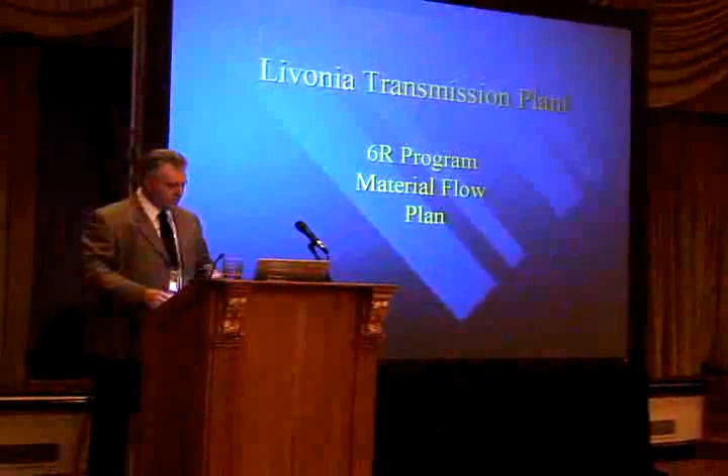Did you have any more questions before we get started? Okay. What I thought we'd do is go through this presentation a little bit quickly, then give you more chance for questions, if that's okay. It's not terribly involved. I hope maybe you've read some of this or looked through it before, which will make it easier to go through the question period.

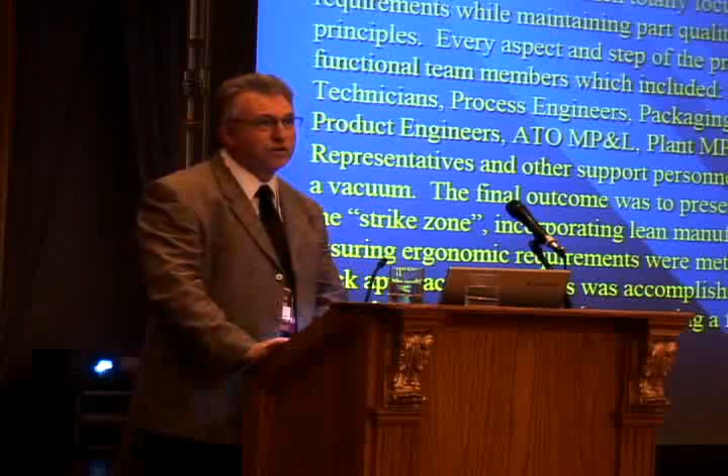In looking through this, you can see, especially in the center body, at Ford we don't do anything alone. There was a whale of a team involved in all of this, as you'll see from some of the documentation, forms, and different things we use. In smaller companies you don't have the head count to do it the way we did it, so feel free to adapt anything as you can. But this was a team from a lot of different aspects that made this thing work.

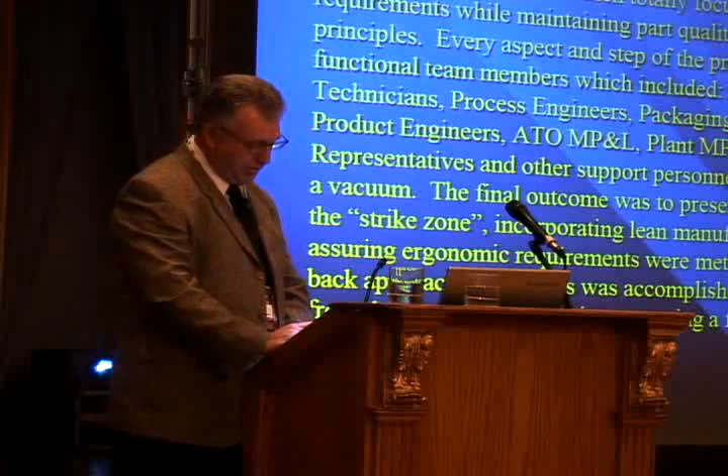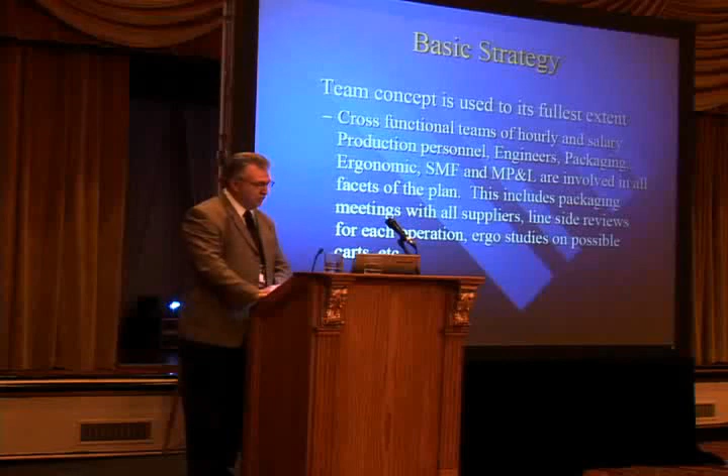More on the engineering side, the team between the ergonomic and the SMF teams—let me explain some of the Ford lingo here. MP&L are the material, planning, and logistics people. I interface with them a lot; they're the ones on the floor actually making it move around, and trucking between plants or between suppliers to our plants. Then, of course, ergonomics was the next biggest thing that fell into all of that, as well as personal safety for the people.

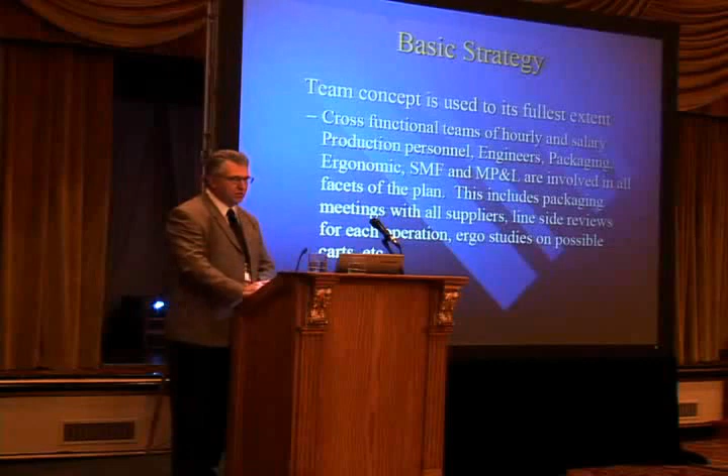This outlines some of the scope.

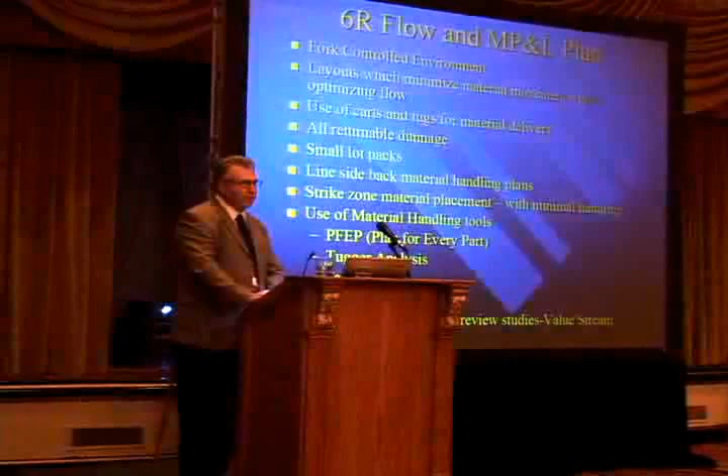When we started figuring out what we were going to do for this program, we had a clean slate when we were building this new line for 6R. We wanted to get away from high-lows and large displays of stock, trying to head towards a lean environment.

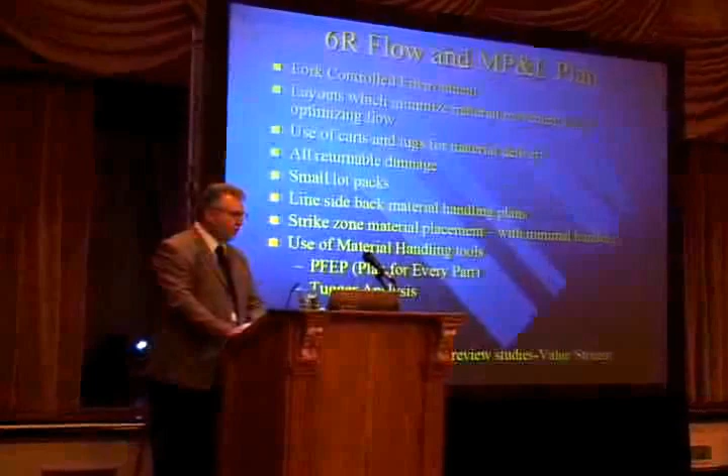So from that, one of the key things was that we started from the line-side back material handling system, trying to put everything in the strike zone so that the tech on the line, actually making products, could focus on that. We took away as many complications, problems, or issues associated with their workstation. Workstation design was a big factor over and above just moving the stock.

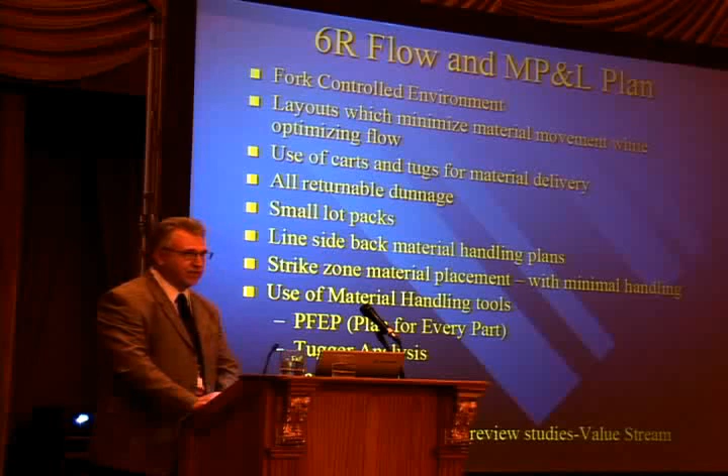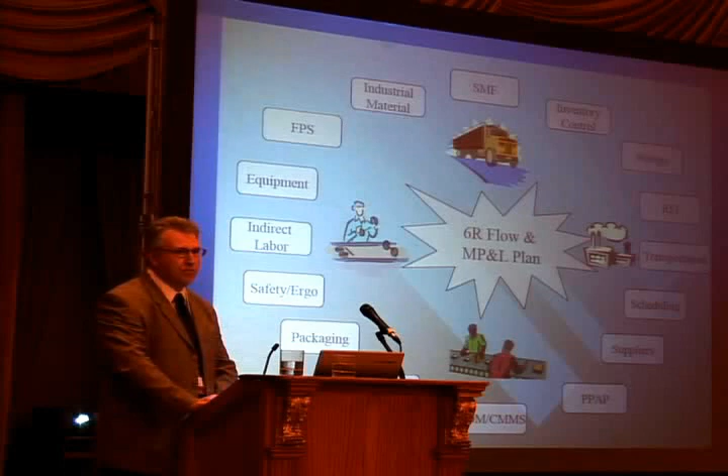The teams and people involved in this included the FPS, the Ford Production System, safety and ergo, packaging, storage, and transportation. A lot of these are various aspects of MP&L, but it also tied in with manufacturing engineering, where we take responsibility for new programs presented to a plant. We design it all out and then start involving the plant people in the application and instilling it onto their floor.

These were some aspects of how we wanted to control it: the material flow routes and frequencies, how often we brought stock to the line. Two hours max, one hour minimum was our desire, to minimize how much space was taken at the line.

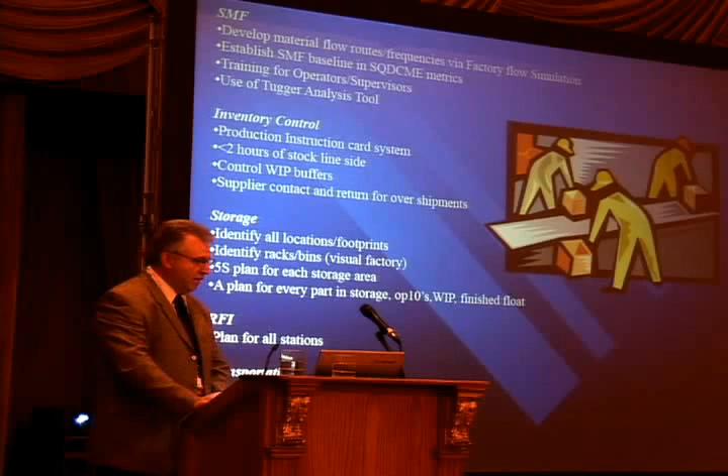Suppliers were in contact with us all the time, or we were in contact with them, trying to set up a situation where what they sent us is what we really want: the 6 R's—the right size, in the right place, at the right time, the right quantity.

As far as transportation, the MP&L side worked closely with setting up the windows—how long a truck could be at our plant, when they would be at our plant—because we did not have a large warehouse facility set up to store stock.

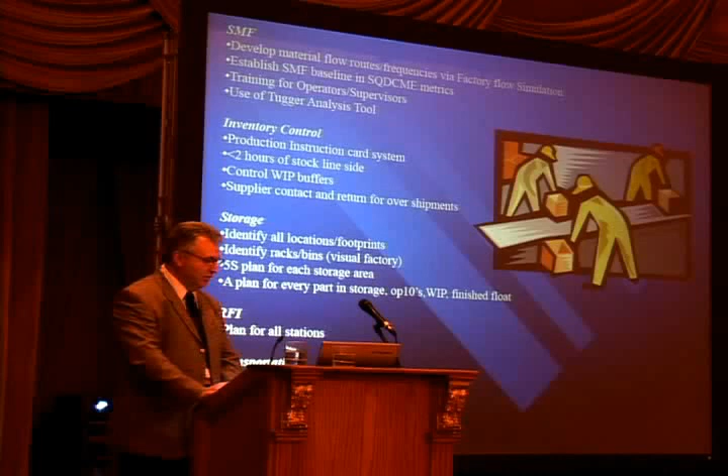We had set up card markets and call markets, and the call market was the smallest we'd ever had as far as trying to service a line. So everything was set up on demand, a pull system that's just in time.

The suppliers worked with our packaging engineers on the PFEP. As they populated the information, we put it into a plan for every part. It was documented to everybody.

You had the max sizes, the tiers, the grosses, right down to if it was a tote, how much stock was in the tote, the size, the weight—everything we needed to know so we could handle this thing safely and easily.

The dunnage was all returnable, and that was detailed again in the PFEP. The packaging information all started from the Form 150, kind of a sacred form we have now. We used to have a Form 1120, and everybody in their world had their own copy of it.

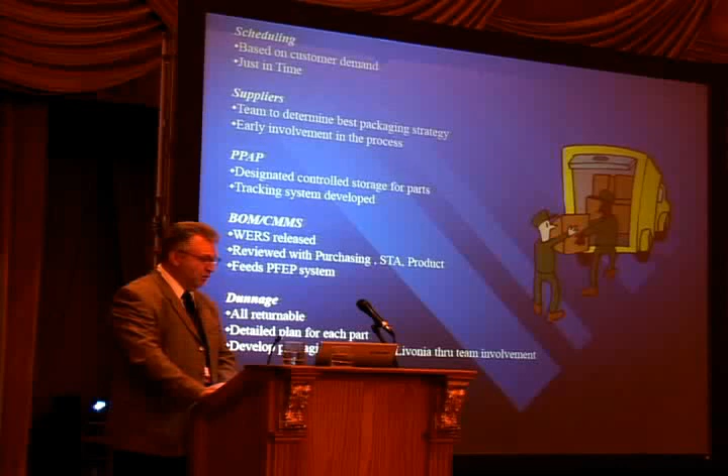The current Form 150 is standard across the line. There is one, and that's it. So we've been able to standardize on a few more things for ourselves.

Again, looking at what the operator touched, the tote weight was 35 pounds or less, and you had your strike zone.

We tried to minimize any indirect labor involved so that not many people had to touch this thing, because the more times you touch it, the more things go wrong.

The Ford Production System work groups—we had many reports on how to track things, and we track things a lot.

5S is how to clean up an area and set it up for yourself. There's a whole detail of that kind of information.

And then we had a 1295 form that when you buy something, if it's going to be used on the floor, you have to have repairs in stores, spare parts, and who's going to repair it. Everything is documented before you bring it in—or at least that's the entire intent.

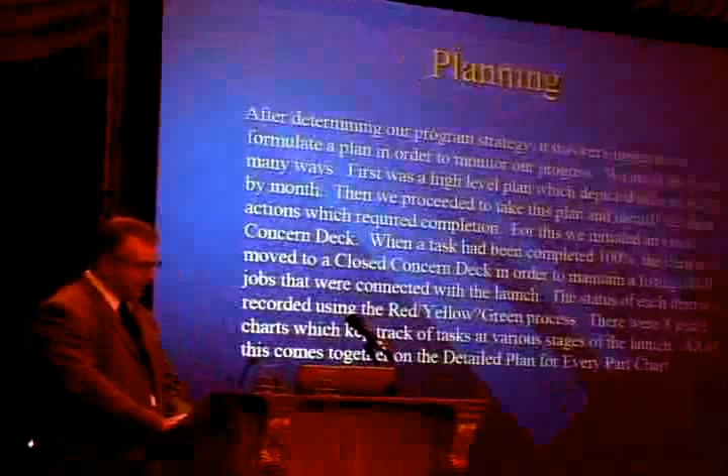And then something near and dear to more supervisors at Ford are the 8-panel charts that tracked everything down to how much dirt was swept up, I think.

As I say, when we track stuff, we tracked everything. We had charts for it - you can read through these at your leisure. But it just did show that whenever we were focused on something, timing was everything for a lot of people.

That we had to bring it in on time, and it was developed to follow that. As I mentioned before on the PFEP, we tracked for the part numbers, who the supplier was, the part weight, length, width, height, density, unit pack, because that followed into our min-max levels - 2 hours max line side, 1 hour minimum, whether it was a call or a card part. The call parts are obviously the ones where the density sucks.

We've had parts as small as 45 parts per unit load, like torque converters or something like that, so not only were they clumsy, the density was low. For both the call and the card parts, we had a line side address where everybody could keep track of where they were going to.

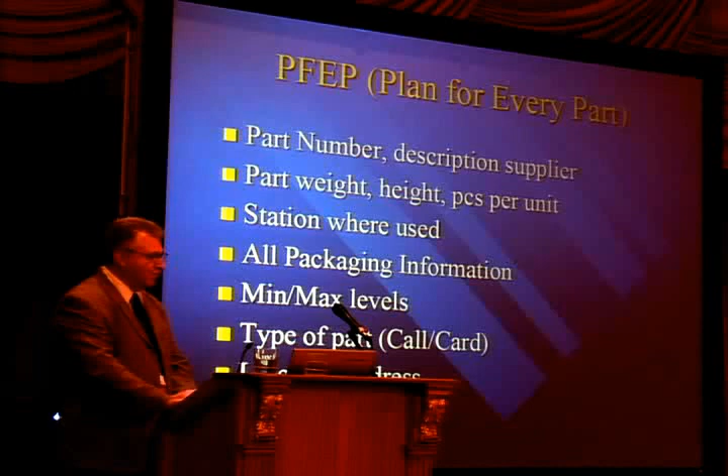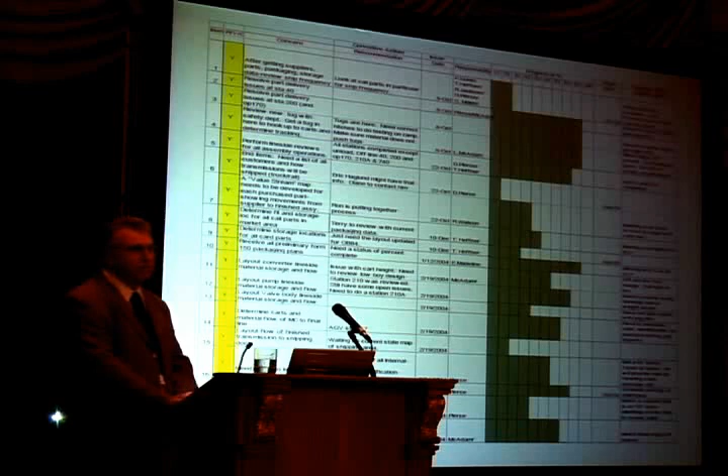So we wanted to make sure this was resolved and everybody had input. If you didn't attend the meetings, it was your own fault, but it was all here for everybody to follow up on. We did have a few reds, and even showed up on my line, darn it.

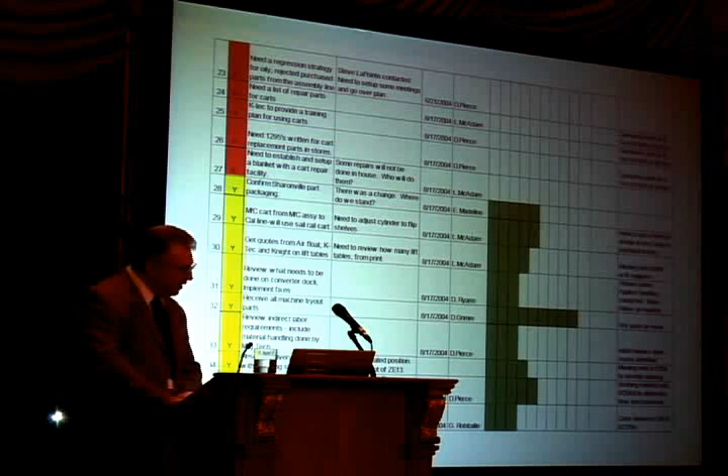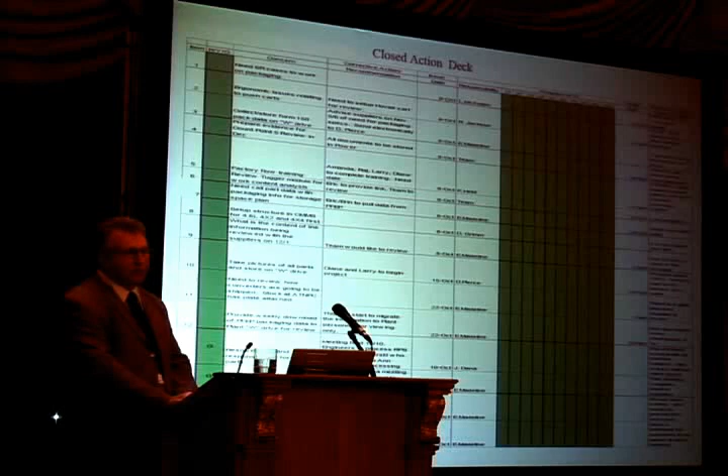When we close things out, you keep the history of that so you know how they were resolved in case it comes back again, or you run into that issue on your next program. Part of your lessons learned, you might as well keep the action decks and all the issue information there - was it resolved in a timely fashion or not, so you know whether that's not the solution we want next time around.

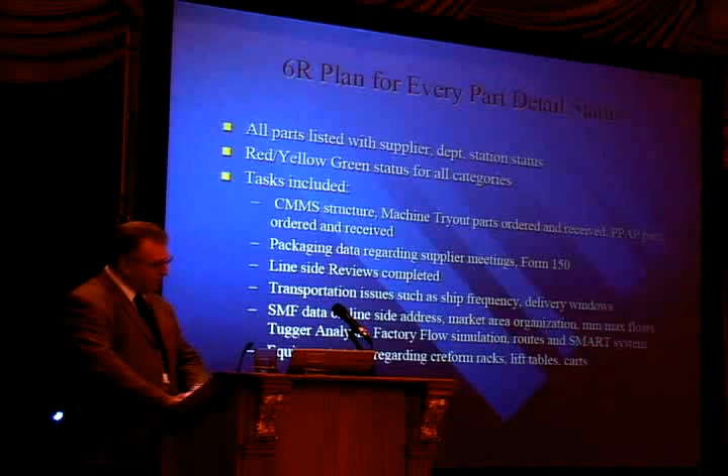Some of the tasks that we had for the CMMS, which is one of our main computer systems, and the machine tryout parts, the PPAP parts - if you're a supplier to Ford, you're familiar, or pretty much anywhere you're familiar with what that is.

Further down where we did the min-max floats and the tugger analysis, we simulated everything that was going to take care of line side address, right out to where the truck was when it came in on the property, what dock it went to, when it would be there, when it wouldn't be there, and what market it went to, call or card, and how it got there. Then going out to the line also was routes, and then coming back.

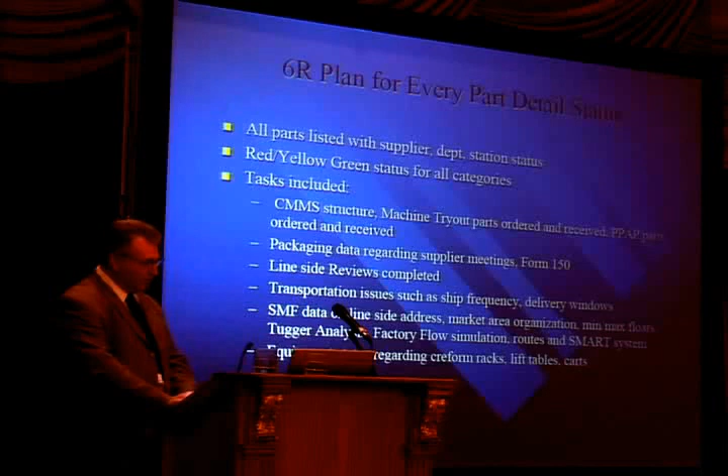We did a lot starting with the line side address, so we looked at - I'll use the brand name - Creform racks, how you displayed the card parts mainly, whether we needed lift tables, and definitely whether we needed carts, how we were transporting it.

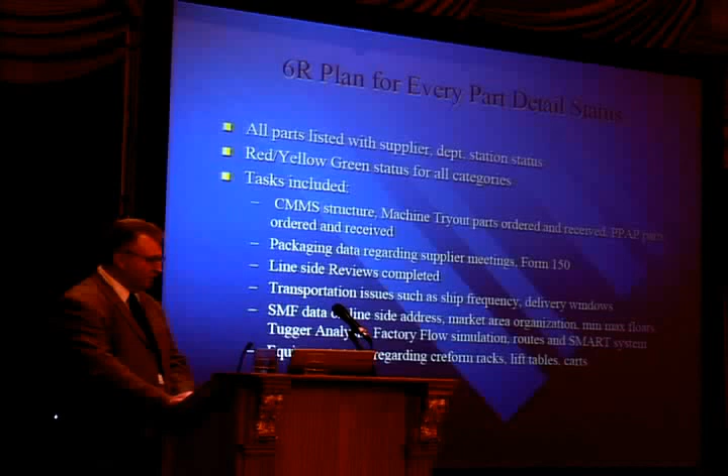And because that matched all your pre-production builds - if you're going to do a 1 off or a 50 off on a line, you wanted to make sure you had enough parts to make all 50 transmissions. There's only 235 parts basically in a transmission, so only 1 or 2 could screw you up.

Again, as we said, there were a number of people, teams and lots of team members. You were invited to every meeting. If you didn't attend every one, that was fine - just send a representative.

Another big thing when we got into carts that would be used for call parts was the ergonomic push-pull studies. There's 50 pounds initial force to get one moving, 35 pounds sustained on a load of approximately 1,500 to 1,800 pounds.

When we decided to go to carts as a transportation system rather than forking everything, that was one of the criteria, or some of the criteria, that went into selecting a supplier, because they had to meet that and a number of other criteria that we'll get to a little bit further down the road.

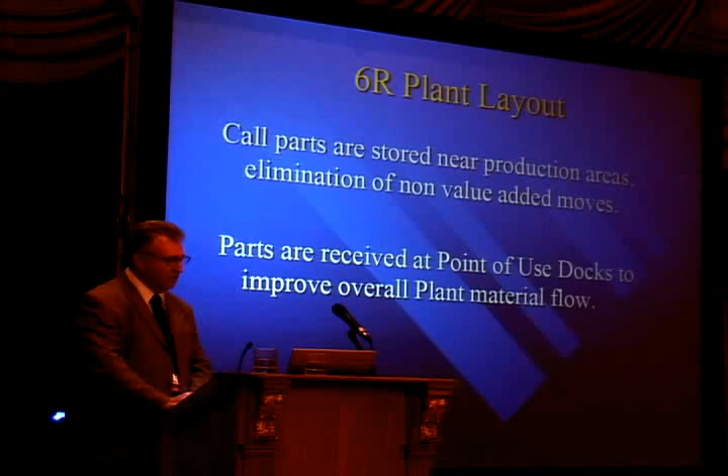Now all the call parts are stored near the production areas, and when they were received at point of use docks, it did improve our overall flow. We tried to make sure that there was a dock near where we needed the material to be stored at, so it just decreased how many people touch it and how long.

The 4-speed transmission is a current transmission we make, I think there was like 28 different varieties of this transmission. We're down to a few less now as the 6R takes over the market. Again, this was a 4-speed rear-wheel drive. We're making a 6-speed rear-wheel drive, which gives you better fuel economy, a little bit smoother shift action.

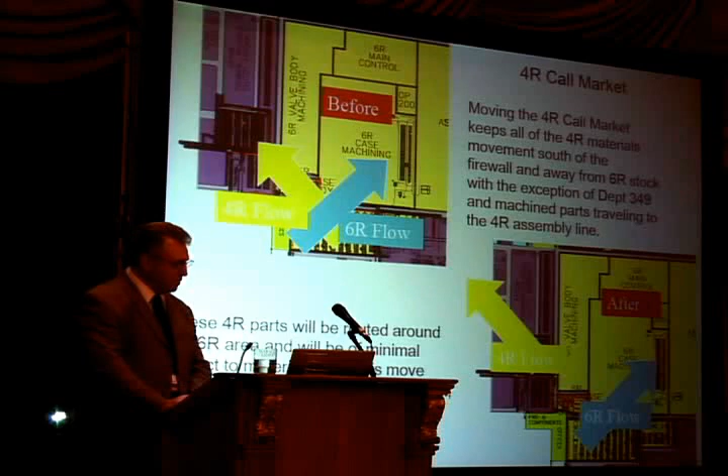But what we did here was relocate some of their markets to make the 6R market flow better. The particular spot down at the bottom where you see the front-wheel drive and components offices, I have a lot of people coming out of those and going in and out of those offices on a regular basis. So pedestrian safety was an important criteria here also.

And that's one of the things we have to simulate to make sure that we don't unintentionally hurt anybody along the way here.

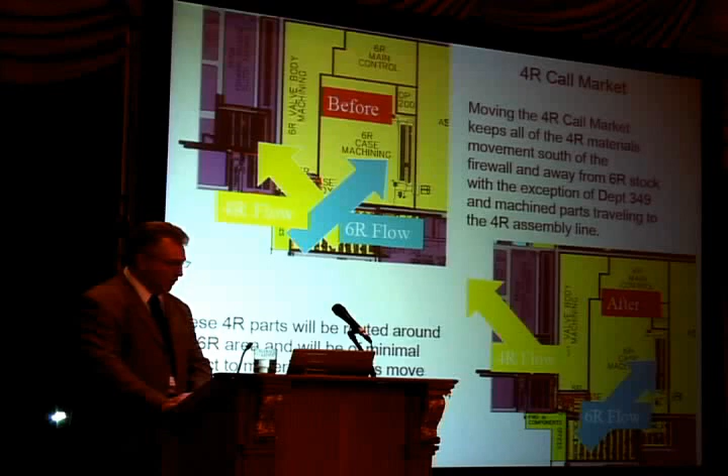This is a little bit difficult to see, but anything that we needed for layouts, changes, how much space is required, it's all valuable space. You're not manufacturing something. So we had to track it and make sure that everybody was in agreement. Again, that was another set of meetings, but everybody came to the meetings and spoke their piece, and then we came to an agreement.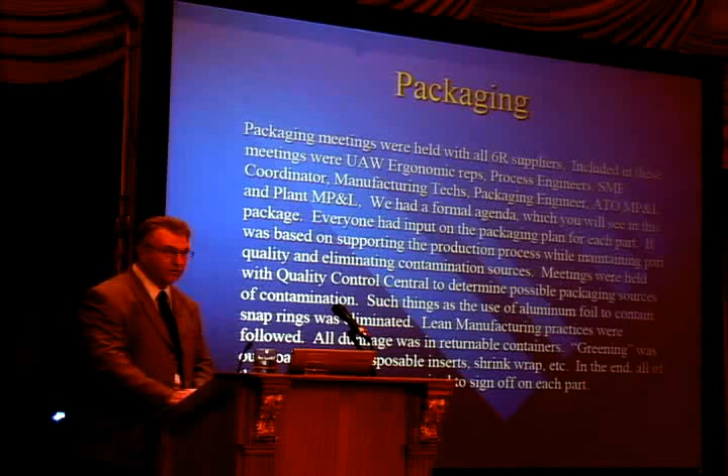The packaging meetings were mainly handled by the MP&L side, but they would fill in the Form 150. Once we got the Form 150s filled out, we would go through this at our standard meetings with all the techs, material handling people themselves, and include more of the layout people also, just to make sure that everybody was in agreement with how it was going to be handled. Because again, you assume certain things and they don't always pan out that way. Some person's impression of something was different than what you would think would be obvious.

The packaging strategy was, one, to green everything as much as we could to get rid of expendable dunnage. We did it across the board.

We had a designated packaging engineer that just worked on this program, and she did an admirable job of making sure that we got what we needed, but it was also something the supplier could live with.

At Ford, it's supplier-owned returnable dunnage, and it's blended into the piece part price and amortized over a certain period of time.

Internal dunnage, which was more my responsibility if it's in process, and we usually launch off of whatever the shipping dunnage was. If the part is still very similar, we keep things standard. We'll use the tooling that the production people use from the supplier, and pay a royalty to actually use that tool if necessary, but we're buying it in the long run.

Then the easiest thing in the world was you just stripe it a couple different colors, and it's acknowledged in the visual factory that it's a returnable in-plant dunnage.

The pallets were standardized. We went to a 45-48 or a 32-30 pallet with seat belts. There's no banding, definitely no steel banding allowed anymore in a Ford plant. You can get it, but it's a special dispensation kind of thing to get it.

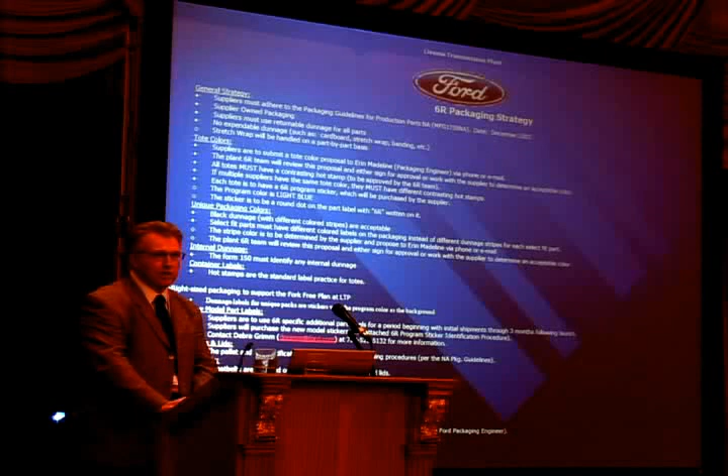And again, more ways to track it. This is an example of our Form 150. You get actual pictures of the part, individual part weight, the container that's being used. If it's a standard container, it's got a TA number or an SP number or something like that. If there's any special or unique features about what's going to be involved in this packaging, it's all detailed on here. And down at the bottom, what you can't see is we had a spot for 6 specific people or job functions to sign off on this before it was accepted as fact.

But all the information, even though it wasn't nailed down at this point, it was on the PFEP, so that we'd all track it. It would be just colored or indicated that this was something that was in development. Once it's fixed, and we've all agreed on it, it's tracked under a different color or indication so that everybody does know, that's what we're getting.

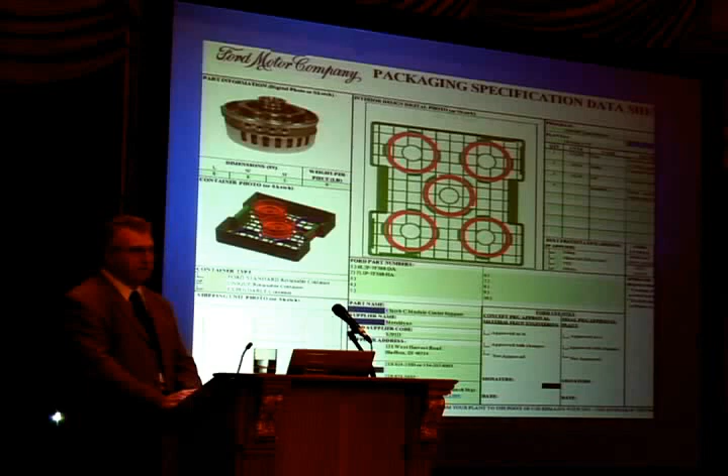So again, on Wednesdays, we had a standing meeting for our line side reviews, which you'd seen the check form before. And that had to be signed off again by the 6 people, or the 6 groups, a representative from each one, confirming what it was going to be and how it was going to be handled.

And this is as detailed as it got. We had a small spot over in a crib, and we would actually set up the work pallet where the transmission was being assembled, how all the dunnage and the creform was built to display it to the operator. Everybody, including a lead tech for that section of the line, was involved in it and signed off on it.

So we would make up our form of whatever we had to present to everybody, so that we didn't create it while we were out there. You would put all the standing information on the form and then let everybody read through it, checking it off one step at a time.

Really important at this particular time were the ergo reps, be they divisional or union, just to make sure that it was in the strike zone and met the long-term functions. You can do anything for a couple hours, but if you have to do it day in, day out, you just want people to go home tired, maybe a little bit bored, not wiped out, not sore, not regretting that they have to come back in and do it all over again tomorrow.

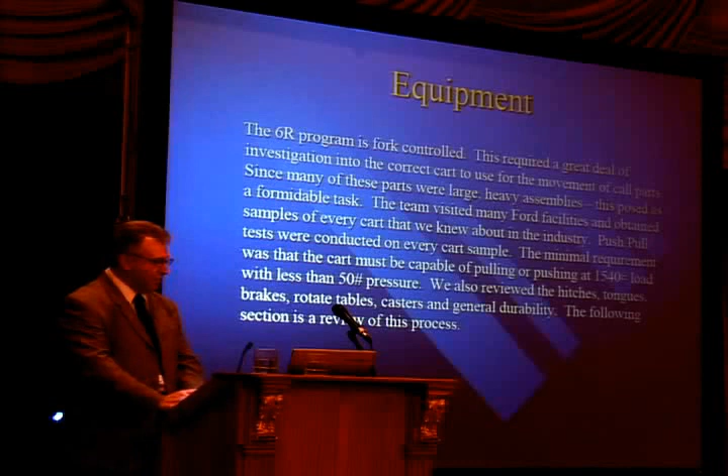When we did move something, which was the tug carts, the minimum pushing or pulling force was 1,540 pounds at less than 50 pounds pressure initial. And then we looked at a whole different bunch of things because we hadn't had them before, like whether the hitches and the tongues and the brakes, everything - how do you use them, who uses it, what do they do with it when you park it. A number of other things came to light about how we would do it.

My friend Scott and I were here testing a particular cart, and everything we did was tested on the same piece of floor so you know it was flat. Later on there's still the how-to on an ergonomic push-pull test, and everybody had to pass the same test. We had about 8 different vendors send us different carts and configurations, and we managed to launch this program with only 3 different carts.

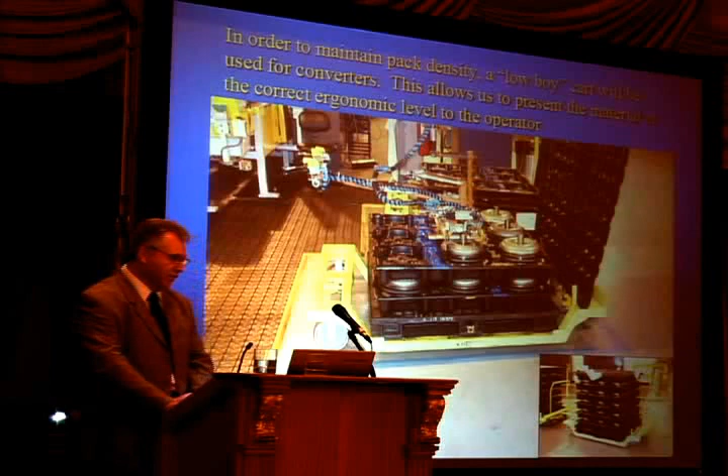Believe it or not, this 4-wheeled cart still meets the 50 pounds or less initial push force requirement, and we're encroaching very closely on 2,000 pounds with this unit load now.

We went to small tug carts to tug the carts around. This is actually a picture taken at a Cleveland plant, but our tugs are very similar, and they squared away or set them up on a 4-wheeled cart. The ones we use at Livonia are 6-wheeled carts, which allow them to turn within their own length. It gives you a much more nimble effect when moving things around a workstation, since we don't give them all that much room.

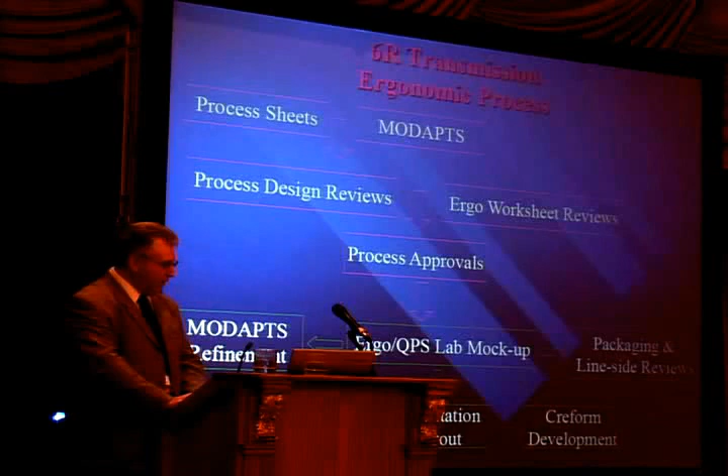The ergonomic process follows down through this flow chart. When we get to the bottom line - the verification, the workstation layout, and the creform development - that's when it's really hitting the floor. A lot of what comes before that is the paperwork side of it, but it has to work, and everybody has to agree that it works.

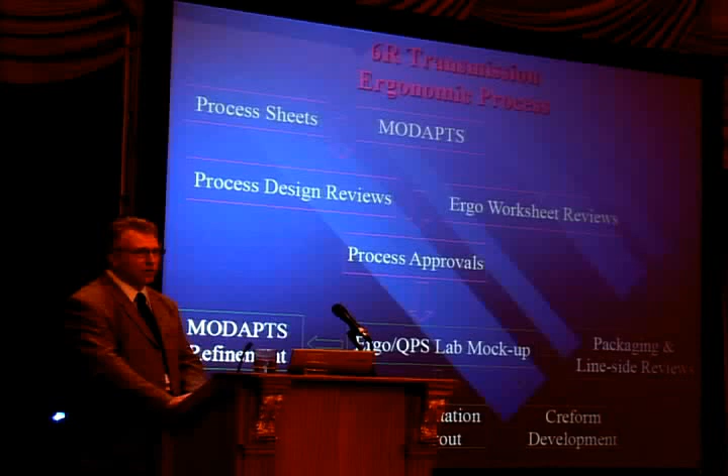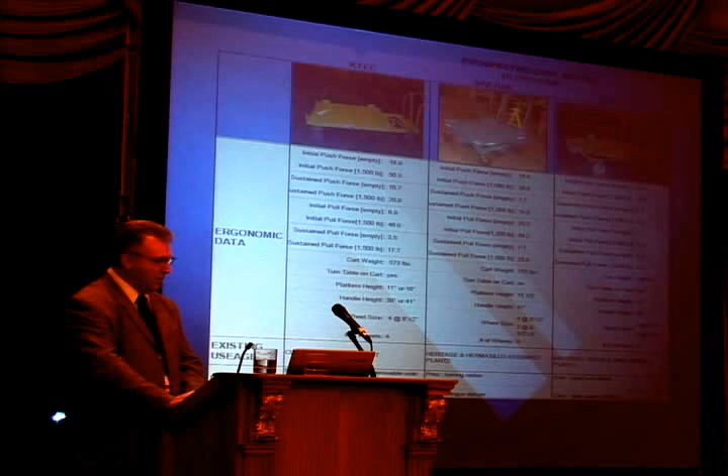This is the push force measurement. Again, it's over 10 feet, and you want to use the same spot on a regular basis so you get standard readings. We did find it's possible to cheat on these things, so you have to be careful of yourself. You learn different ways to push a cart, but you have to get back to how the person who does this every day, all day long, is actually going to do it.

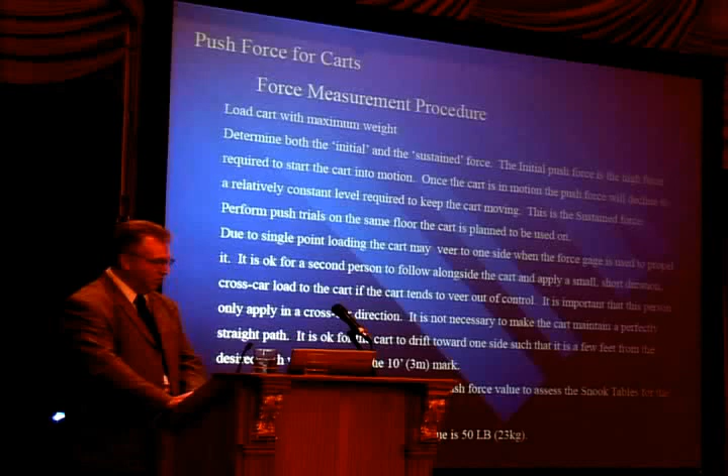So again, we set up the process and rules to follow for how to do these tests. The initial force is, of course, when you first go to move it, but we tried to make it as difficult as possible so the worst case scenario was portrayed. We would turn the wheels 90 degrees out of alignment with a full load on it, give it a push, and the gauge we used was probably about the size of a thumbtack where you actually touch the handle - so you were getting the worst possible chance at making this thing work or fail.

We also timed the travel so you really had to keep the person in cycle and within reason of their job expectations. There's also the sustained force - once you got it moving, how much does it take to keep it going?

Something you don't really think of at this point is that somebody's going to have to stop this thing. When you get 1,800 pounds of something moving, and you've got a 95-pound female at the low end of the height range, keeping control of this thing is a major factor. We wanted to make sure it was something they could plant at least one foot and slow down or steer and direct. That's part of why we went to the 6-wheeled cart, but it was a consideration - everybody could get something to move, but you eventually have to stop it safely.

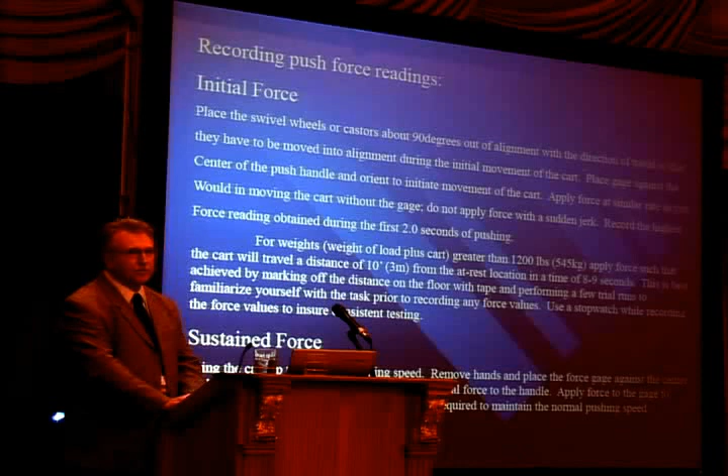You do eventually have to stop it safely.

This was some of our criteria that we put on there. We wanted it to have 6 wheels because we found one that was very nimble with the 6-wheel design. We positioned it a little bit differently, so it was about a third back under the back end of the load. We wanted a rotating deck on the cart so that we didn't have to worry about rotating features to get the cart to move, because moving the cart takes more room than just moving the deck.

We did want to be able to lock it at every 90 degrees. We wanted the tongue to fold up and get out of the way so it wasn't a great trip hazard, because they really do hurt your shins.

We want to make it easier for the Hilo driver. We put locating plates on the corners, gave them a larger deck than the pallet so that they had room to place it on there.

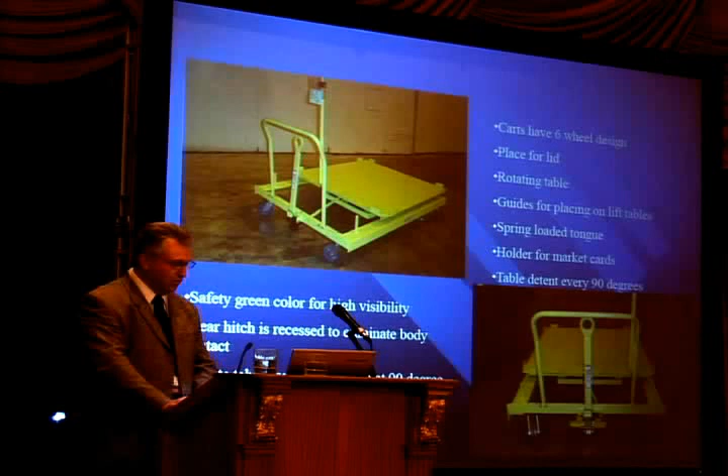And we had a floor lock. It's called here as a floor brake, but it's a floor lock. It'll keep the cart from wandering off if the floor is uneven or something like that. It's not something you could put on and stop a cart when the cart is moving. It will help, but you've now taken your foot off safe, smooth floor and put it somewhere where you have a good chance of picking up an injury.

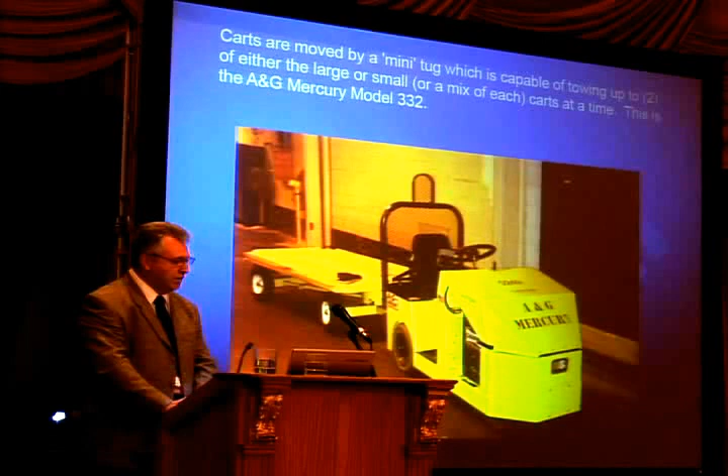This was the particular tug that we ended up using at Livonia. Safety did ask that we had a screen on the back to protect the operators from anything coming off the carts if there was a sudden stop, and a bit of a head rack thing there to protect the operator's head if they're a little bit taller than the average.

Now, these carts did require occasionally to be lifted. So we designed into the base of the cart a way of locating it to a lift table, and then we came up with a new lift table.

As I mentioned, we had 3 different kinds of carts. The low boy we had, this is the larger, a 50-inch of the large carts. We also have a 40-inch deck, which took the 32, 30s, and anything in between that. The same lift table works for either of the 40 or 50-inch carts. We try to be as generic as possible on this program so that if we ever change something at a station or whatever happened, we didn't have a lot of, I don't have the right one. And this was one way we kind of ironed that out.

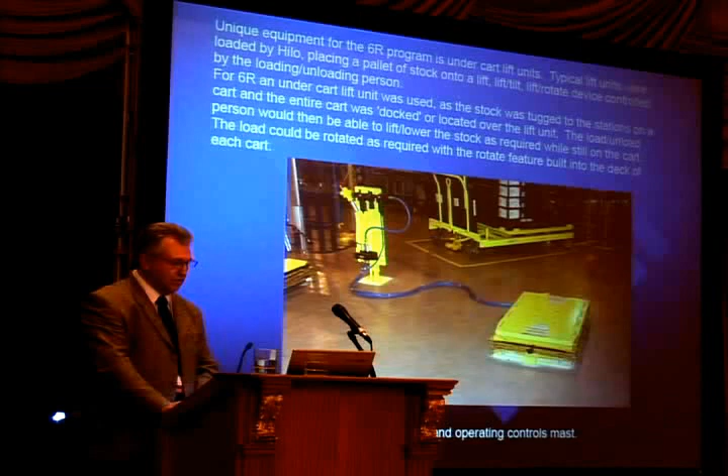They are air operated. They collapse down to about 7 inches in height. The carts we use are provided by, we buy them from K-Tec, but we worked with K-Tec and the lift table supplier to make sure that they interfaced well. There's leading tapered edges on the top deck of the lift table that mates up to some leading edges, tapered edges on the bottom side of the cart, so that makes it easier to locate the cart to the lift table when you need one. And that's as simple as how it is to dock it. You just push it on over there.

Towards the left side of this picture, by the handle, you'll see 2 posts sticking up. Those are where when you take the lid off the load, you've got a place to put the lid, so it's, again, with the pack, but it's not on the floor, it's not getting lost somewhere, it's not falling over in somebody's way. It stays with the whole unit pack.

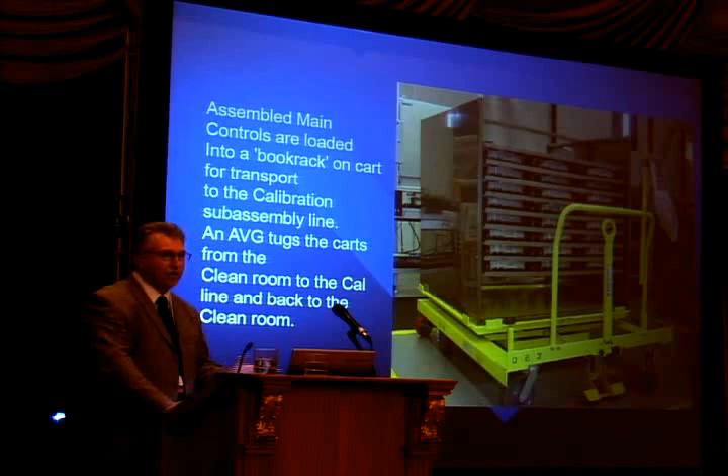This was another idea we had, was that once we purchased the carts, you've got a lot of money tied up, or some money tied up in the carts themselves. This required a unique top to it for our main control valve bodies. We made a book rack cart that each one of these layers opens up. You'll be working at it from the other side, of course. You always work from the back end of the cart, not at the handle end. And then when you're done unloading that side or loading that side, you just rotate the thing around and you fill up the other side. But the nice thing was that this just bolts to the cart. Whenever this program goes away or changes enough where I can't use this top anymore, this top hat, I just unbolt it, either scrap it or rework it, put a different one on there. If not, I've got the cart back, which can be quite a savings there.

This is some more requirements we had for the carts, that they had to be able to roll over the lift table and the ergonomic devices. And we even had built in a little device there that there's a switch on the lift table itself that the cart has to be fully onto it and make the switch before the unit can be lifted. And again, K-Tec worked with us on how to put that in there so it would handle all that kind of stuff. We wanted it to be welded.

Everything had to be retained and contained within the cart itself. This time we were looking at 4 or 6 wheels, then we found the 6 wheel to be better, and that's what we went with across the board, with the exception of the lowboy cart.

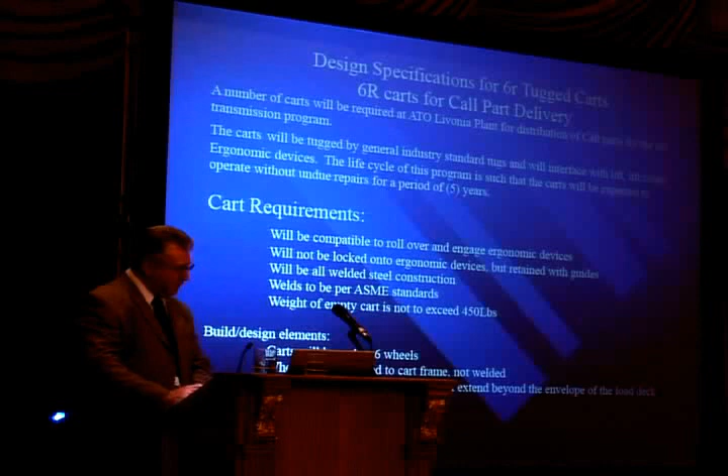I think about the only change we made on this whole thing after we designed the carts was that we did stick with the 4-wheel or the 6-wheel cart. We only tugged them in 2s. That's the way it was simulated anyways. And all the other requirements we called out are pretty much the same.

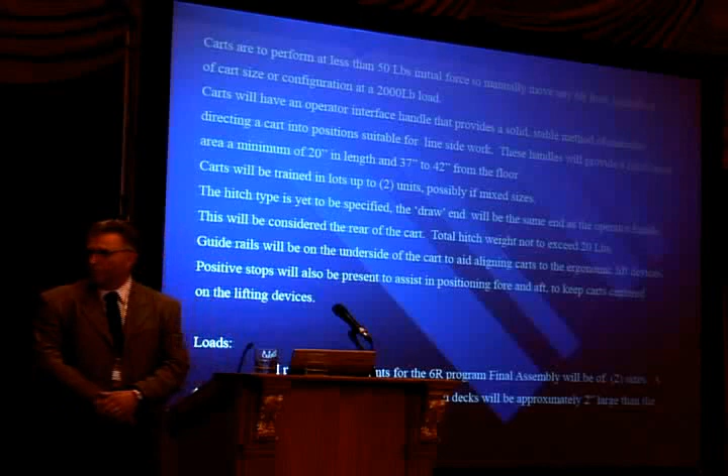Now, Larry, at this point, if you want to interject anything, we had all these requirements, and then we drew on you guys to make sure that you could fulfill them. Like I say, we had 8 other suppliers that sent in carts and stuff like that, but this was the only one that made it all.

One of the things as engineers we were stuck with, and I'm going to share this with you because as potential lean material flow people, you're either going to get carts one of 3 ways. You're either going to buy them from someone like us, you're going to make them yourself, or you're going to go to a local fab shop. That typically is how it's done.

And what we've learned is regardless of the method you choose, the keys that Larry has shown up here begin to show up. In other words, a cart is not a cart. And why are we spending so much time on this? Because this is lean material flow. Well, because this is where the rubber meets the road. When we're done, at the end of the day, this is the vehicle by which all your material is transferred.

And it has to interface correctly with humans 7 days a week with abuse. So the biggest thing we found was most people made mistakes of assuming that I could get something from McMaster Carr or somewhere else and put my dunnage on and we'd be fine. Well, we learned, along with Larry and since then with thousands of customers and carts, that the design detail is really critical.

Things like pinch points, things like rounded corners. Some of the carts you saw up there were first generation. We've since beveled off and cut corners. We've taken off edges where human beings find problems, and they do so very well. They're able to see things that we don't see.

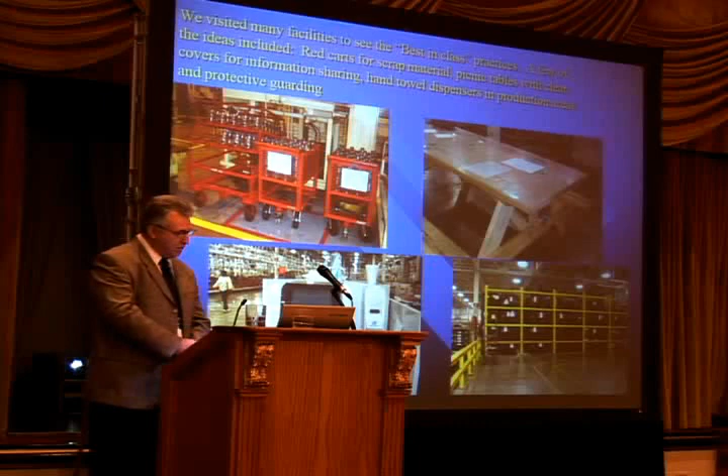We did check a lot of other plants because we were trying to do something best in class. Some of the stuff pertains directly to material handling. The picnic table probably doesn't.

One other thing we did do to prove everything out before we spent a lot of money was to simulate it. You can save an awful lot of money doing some what-ifing here, and it's certainly worth it. That's one of the first things when I do studies now, for putting money in for new programs.

That's the first thing. I'm going to check and recheck a number of things. One, to make sure that I can get everything around and get it back. And two, that I don't hurt anybody - I don't run into any pedestrians or keep pedestrians away from my working equipment.

But they can tell you an awful lot of things. We're probably simulating your work cells, where you're actually machining or doing work, not just the assembly line work. It's worth it. It's money well spent.

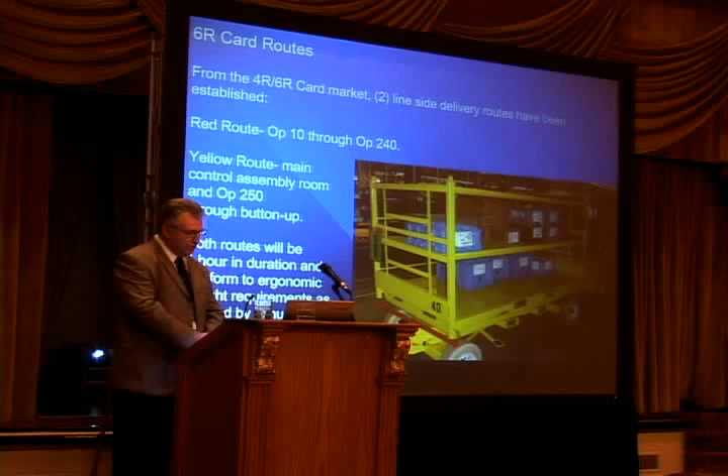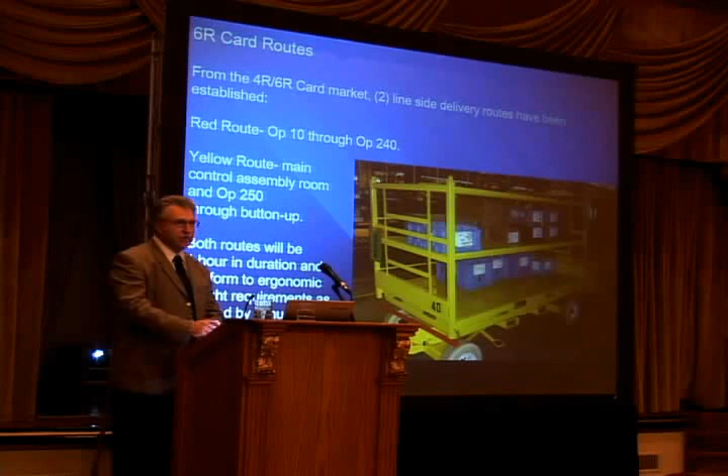When we did our card parts, we started out with, and we went to the quad steer style carts. They've decided to go away from those, but you do things for reasons that make sense. When they could propose a reason to make a change, again, you convene all the teams, you go back through it. We made this thing on information - what changed, was it really worth it to make the change again? So you can make changes, just think them through.

When we did the simulation, we modeled a lot of things here - how people were getting in, getting out, could the thing make the turn in that area? How long does it take? We timed and checked it a number of times.

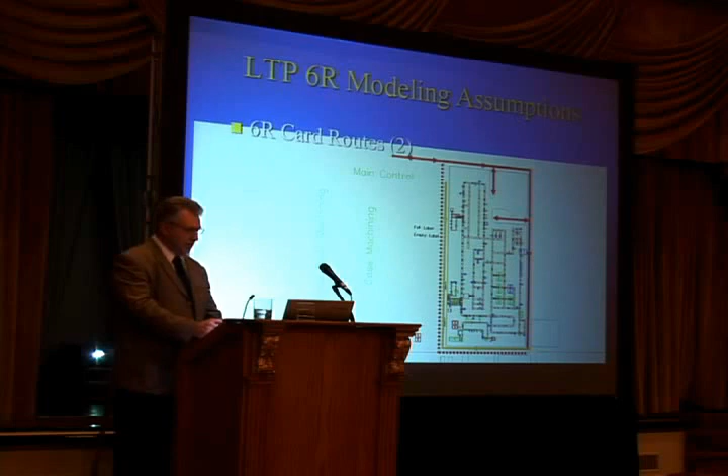We had 2 routes that ended up being on here - the lifting actions for an operator that was going out and delivering parts on the card part route. Total amount of weight that this person had to lift on a trip, and how many totes they handled.

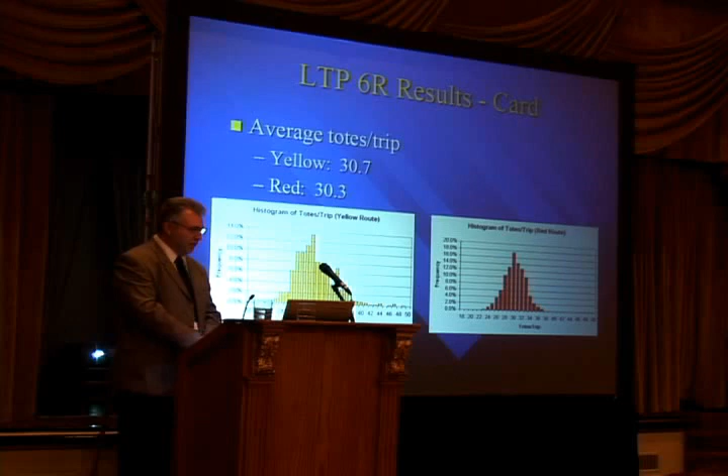We have an amount that we didn't want to overhit. There's an algorithm that works out in one of our other computer systems that checks this. So with the simulation, knowing this, we could plug in that detail, and they could tell us whenever we were over, and then we could make adaptations as we needed to go along.

Again, the weight is important for one thing, to see how much you physically work a person loading and unloading those totes. And two, does it balance out again on your PFEP that was actually what you were supposed to have in there for all those weights, because we know what the weight of each tote was supposed to be. Just a way to back check a few things - how long it took.

By the time you add up all those little times that are put into the simulation and stuff, you can find out whether they have the time to make the 1-hour loop and then rebuild their load. So again, we back checked everything.

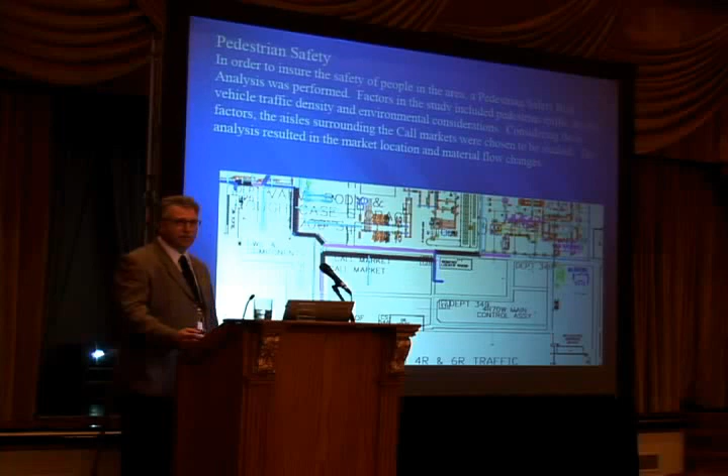And then the pedestrian safety, we even did simulations on that. We knew when people came to work, when they left, where they went, where they took their breaks, where they went to the bathroom, typically whether it was mass relief or individuals, when and where. My little corner down there at the bottom left was a potential hotspot for us, and we found ways to either time the pedestrians or time the loads so that it wasn't quite the issue it was before, and we got a green on all of that from the plant safety office.

To date, we really haven't had anybody injured due to tug interface like we used to with high-lows. Some of the things about the pedestrian safety, though, was we relocated some aisles.

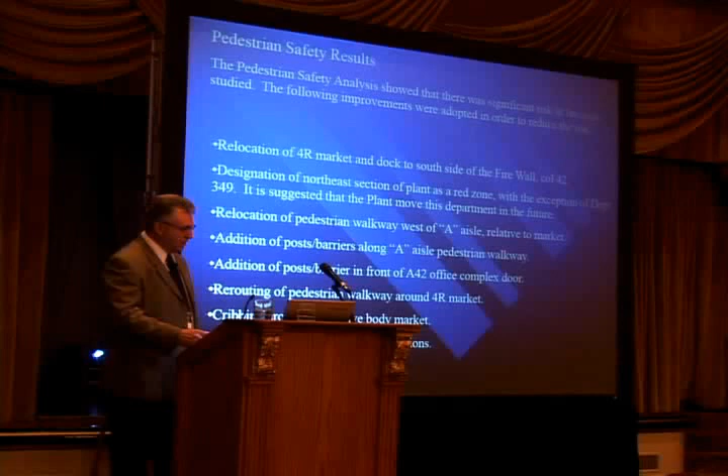We put barriers in front of some doors so people couldn't just walk out into aisles. We used cribbing around some of the markets so parts couldn't be knocked over by a high-low movement. And we put up mirrors just so people could see around some corners.

For the synchronous material flow, we had a smart card system. When people pulled things, or there was a button they could push when they needed a call part, the guy could start building his load immediately. It just smoothed a few things out.

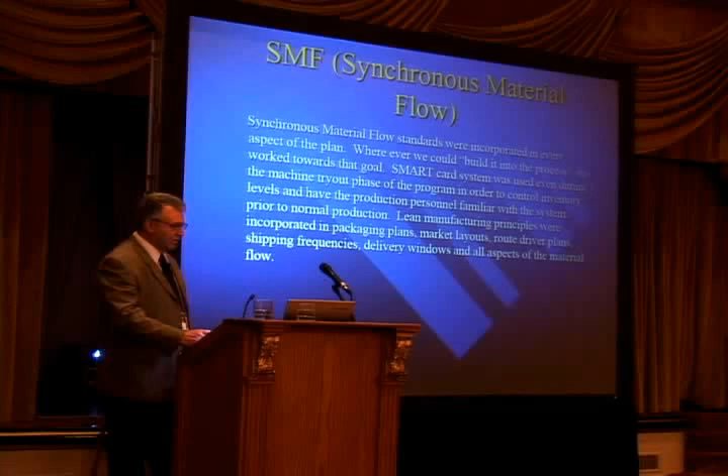We found out a few more things here. In the part description, we took a picture of every part, and in the background there's a little checkerboard - actually a 1-inch square black and white dot. When you photograph the part with that behind it, everybody gets a good way to measure it quickly, a good idea of length and width. People who've worked on the lines know about how big something needs to be, whether it's going to fit in your workstation or not.

We also tracked who was moving something, when and where, and the frequency, to see if it was going to be a problem, so we could smooth some of these things out.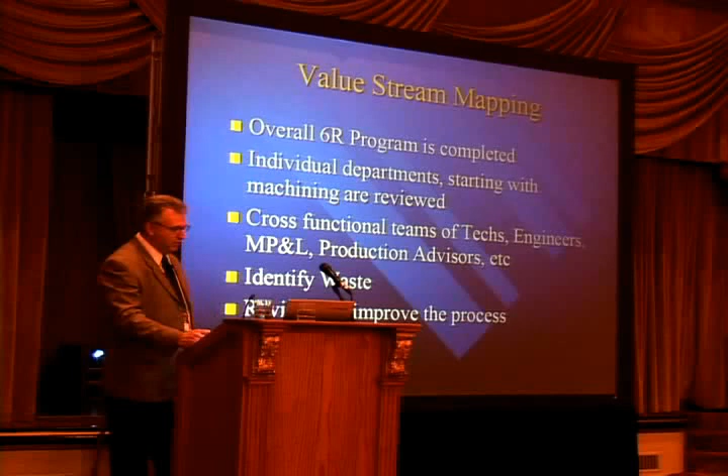The value stream mapping process was built partly into the simulation, and a little bit standing alone was just figuring out how much do we need at any given point. I'm not an expert on value stream mapping, so I'll just say we included it in there, and we had a very good representative to help keep us clean on that front.

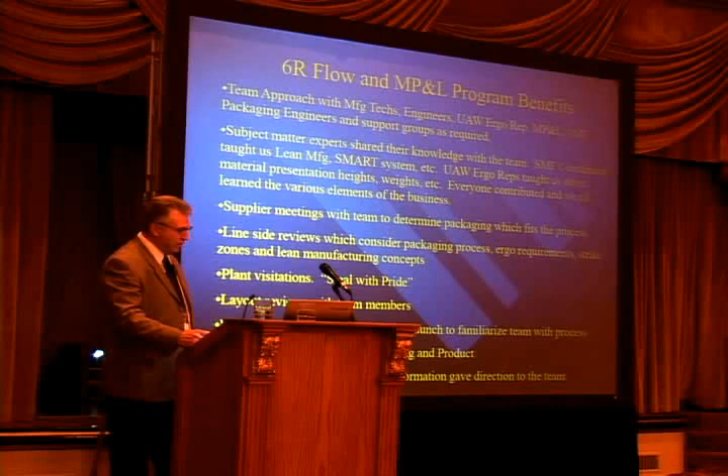The benefits were that when we stole any good idea we could find, whether it was at a Ford plant or somewhere else, the suppliers interfaced with us. They learned how we were doing things and understood more of the why, and they stole a few of our ideas for themselves, which was great. It was a win-win situation all the way around.

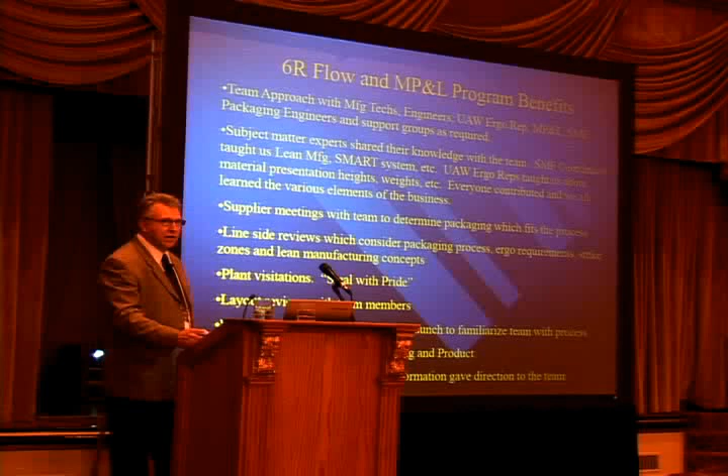The bill of material reviews with the STA people on the purchasing side helped a little bit. And the line side reviews were one of the big key things for us.

Selecting carts was a real step forward for us because we've done that on every program since. They've all been modeled after this one, taking our lessons learned to make sure we're stepping forward. If we find an issue that keeps cropping up, we go back to our issue deck, see how it was resolved and why, and try to do better next time.

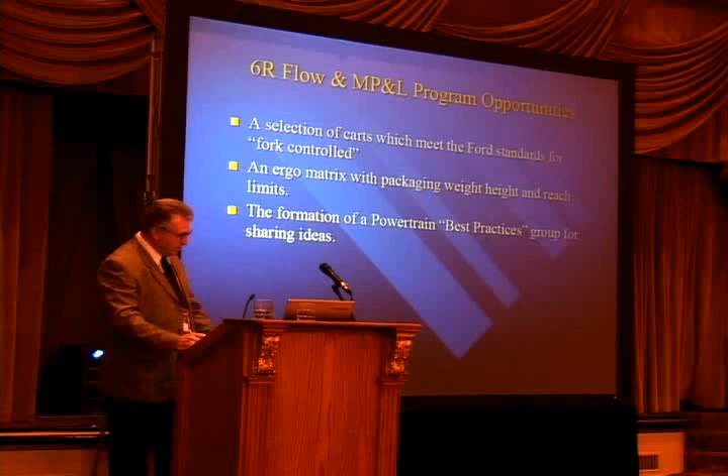And that pretty much wraps up what I've got to give you. If you've got any questions now, we can go into those.

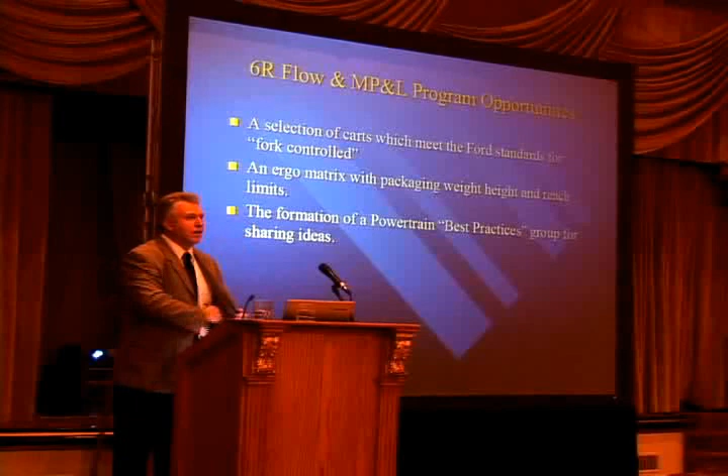What happens if your supplier changes the dimensions without your knowledge? They get QR'd, which is a pretty good black mark on there. Certainly we're not going to stop a line by refusing to take the stock, but we're going to drag them in and make life miserable for them. You have an opportunity and a forum to make a change if you need to make one.

Let us know - any communication not shared is useless. So if you've got a problem, you've got an issue, tell us, because we're going to tell you if we need to make a change. It might not be pretty, it might not be pleasant, but we'll do it.

What precipitated the need for this particular project? I apologize if you covered that at the beginning - I walked in just a little bit late. It was a new line, and you can always do everything the way you've always been doing it, but we wanted to get a little bit better results as far as making our plants neater and cleaner.

We had a chance at a green slate to make some improvements, so we thought we'd look at what it would take to make these improvements and what would be the benefits. Again, we went through some of that with our simulations before we bought or did anything. We had to convince our management this was a better way of doing business.

It did add incremental headcount, I'll grant you that. It's not cheap from that particular aspect, but it is safer. The material is available to the operators a lot easier. They can make their own changes, especially if you have mixed parts at a station. If you've got an A and a B or something like that, they can actually control some of their own futures.